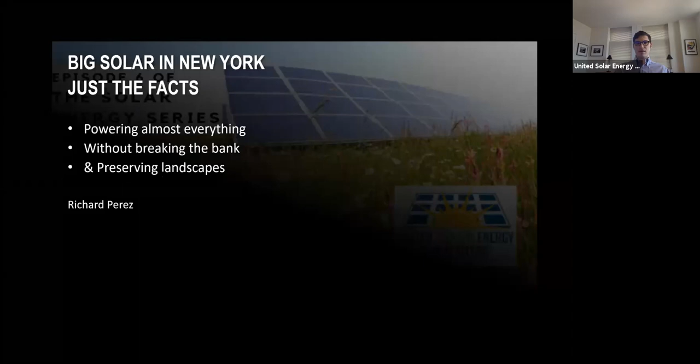So the title of this presentation is Big Solar in New York, Just the Facts: Powering Almost Everything Without Breaking the Bank and Preserving Landscapes. I would like to acknowledge some of my co-authors from Clean Power Research, Pace University, University of Rome and URAC, who helped me develop some of the figures I'm going to present today.

And the plan of the presentation is first why we need big solar, how you do it, is there enough sun to do it, what when the sun doesn't shine, is it cheap enough? Then we'll focus on New York and look at powering just almost everything, the electric sector, as well as electrified transportation and building sectors, and where to deploy while not paving the state over with giant PV farms. And finally, how it happens. Is that more a technology question or a policy question?

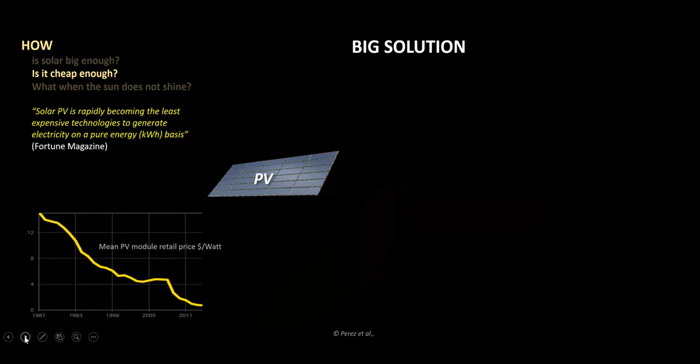So is it big enough? Yes, very likely. Is it cheap enough? Solar PV is rapidly becoming the least expensive technology to generate electricity on a pure kilowatt hour basis. That's from Fortune magazine. This is the price of a photovoltaic module since I got started. So it went down by a factor of 50.

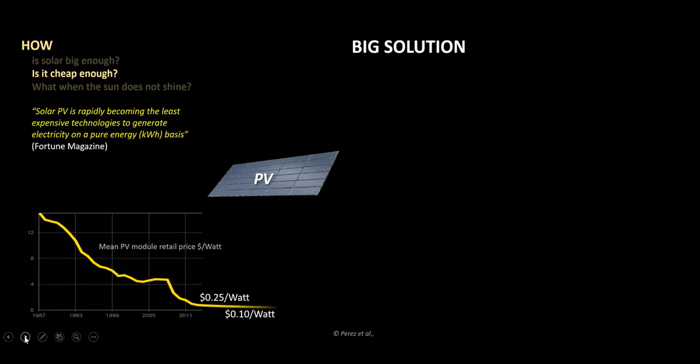And my friends in the industry tell me that a couple of years from now, we can expect top of the line PV modules below a dime a watt. That's the Lazard Bank report, the latest one, that actually looks not at the cost of modules, but at the cost of produced megawatt hours.

And utility scale solar is now almost on par with utility scale wind, and measurably cheaper than conventional generation, including combined cycle natural gas. So we have a big solution. It's also prospectively a cheap solution. But what when the sun doesn't shine?

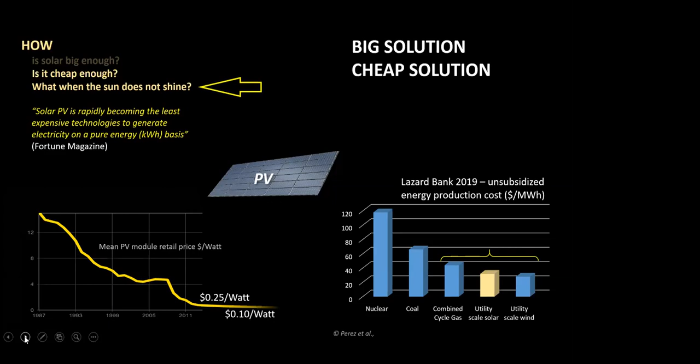Because when I compare those prices on the bottom right here, it's not a fair comparison for sure. Natural gas is dispatchable and can be firm power generation, whereas solar and wind live at the whim of the weather and the seasons. So it's not quite the same. So let's look at that more in detail.

So as a result of that intermittency, solar occupies a marginal position and needs to sit on top of dispatchable, controllable generation to operate, and doesn't acquire a grid dominant position. It would have to be transformed to be dispatchable to do that.

And my opinion is that intermittent marginal position is at the root of some of the opposition that is growing in the country between grid operators and the solar industry, because new plants are built online and someone has to manage that variability. And that's what happens inside the day. It's an intraday issue that's probably easily resolvable with a bit of storage.

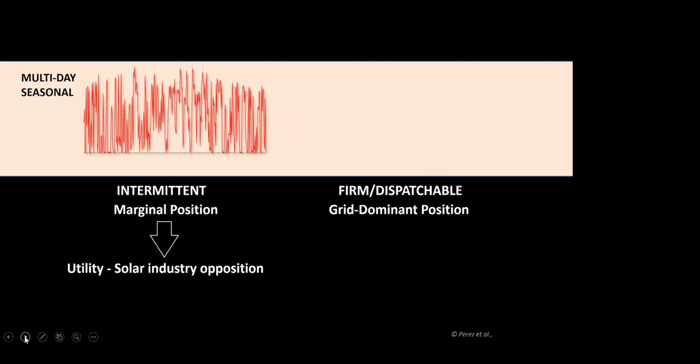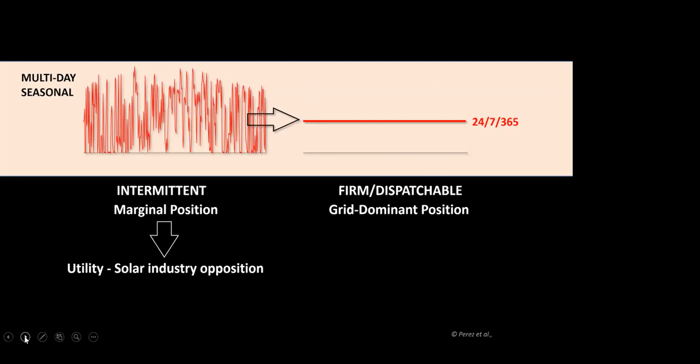The much bigger problem is a seasonal and multi-day problem. When you have weeks of cloudy weather in a row in a low yield season, you have to do something. So solar would have to be transformed into something that's available without fail, 24 hours a day, 7 days a week, and 365 days a year if we want to acquire a grid dominant position and be able to replace this type of generation with solar and wind, which are both variable.

So how do you transform an intermittent resource like solar into something that's firm, dispatchable, 24/7, 365? Well, energy storage is on everybody's lips. And it does work. When you have excess, you put it into storage. When you don't have enough, you take it out of storage. You smooth variability with it.

There is one major issue with it: whereas the unconstrained kilowatt hour from solar is very cheap, see the Lazard report, making it firm 24/7 will cost a little fortune with storage only, because we will need so much of it. And that's even using the cheapest cost projection I could find for 30 years in the future with storage, because we'd have so many holes to fill in the off-season time.

So that sounds pretty much hopeless unless you think just a little bit outside the box and you overbuild the solar resource, and by design you curtail it, you throw away some of the output by design. You don't try to conserve everything that's being produced. And when you do that, something very interesting happens.

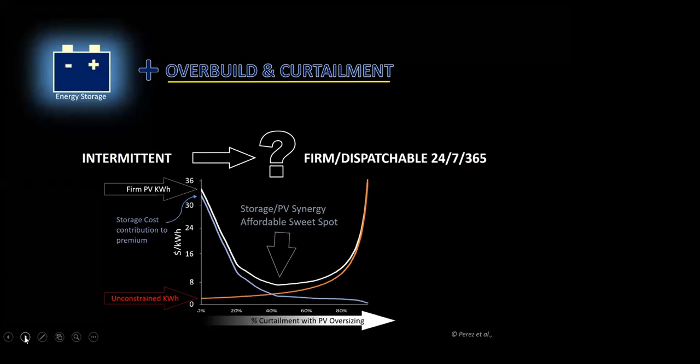But you can reduce it so much that you get to a point that's pretty attractive and can make you think, hey, maybe we can do it big time and be dispatchable 24/7. In fact, that overbuild and curtailment is so effective that we started calling it implicit storage, because it acts as a catalyst to storage. It enables storage to do what it does, but at a much, much lower cost.

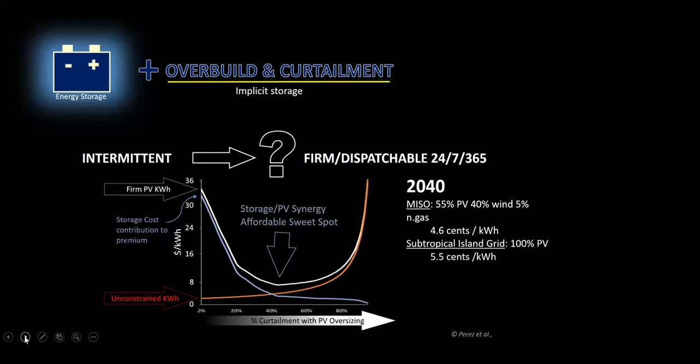And we've backed that up with major feasibility studies. We just completed, Clean Power Research did a study for the Mid-Continent System Operator, where an optimum mix dominated by PV could yield firm generation costs below 5 cents per kilowatt hour in 2040. We looked at several subtropical grids in the Caribbean and the Indian Ocean, and a 100% solar solution also could be done at very low costs. And my colleagues in Italy have looked at the Italian grid and came to very similar conclusions.

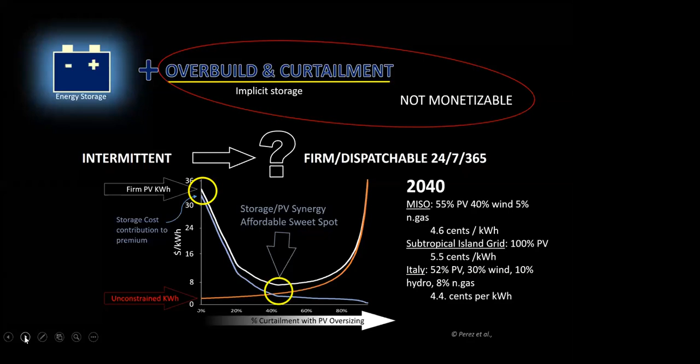The thing is that the solution that would get us there is not monetizable today. Developers are not empowered to overbuild and throw away half of their production. It doesn't work that way. So we're kind of stuck on an expensive marginal road when we could direct ourselves to a low cost and grid dominant future. So obviously what needs to change has less to do with technology than regulation and policy.

And the most effective thing that could be done, in my opinion, is to start monetizing firm kilowatt hours and evolving away from unconstrained kilowatt hours as we have today. So when you monetize firm kilowatt hours, you embed the storage, overbuild, and curtailment, the enablers of firm power generation, into the economic system that's being bid. And that could happen under the form of firm dispatchable power purchase agreements.

And we would have to evolve from the things that remunerate every single kilowatt hour today, the standard PPAs, the value of distributed energy resource, and net metering. And I must say, I've been using net metering for close to 25 years already, since it got legal to do so in New York, and I've taken full advantage of it, but it didn't necessarily help the grid to generate firm power from my system.

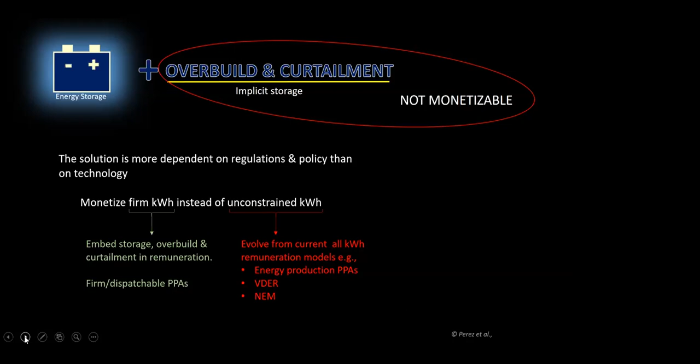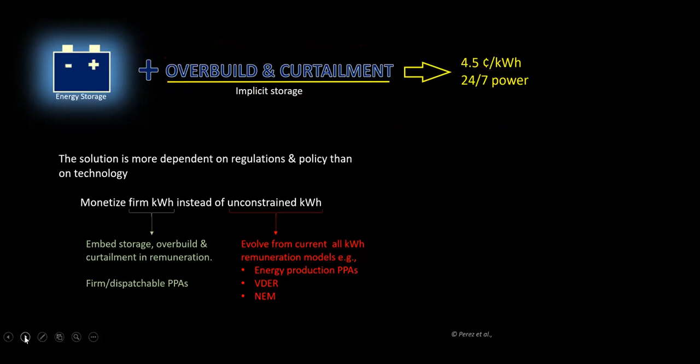So if we do that, we can look to a future that's both fully dispatchable and not very expensive at all. These are numbers that came from our MISO study, the Mid-Continent System Operator, which is a very large grid operating service that runs from Louisiana in the Gulf of Mexico all the way to Canada. We looked at every single region of that grid, and region 7 is not very much different, at least climatically, from New York. It's the Michigan part.

And in that part, the optimum solution is about 55% PV, 40% wind, and 5% that we kept of legacy natural gas, with an optimum PV overbuild of 50%. And that yields 4.5 cents per kilowatt hour by 2040, and by 2050 it would be 3.7 cents per kilowatt hour for firm power generation. So not run-of-the-mill PV, but firm, available 24/7. If you're interested, you can go into that study that's been published by the Minnesota Solar Pathways at this web address.

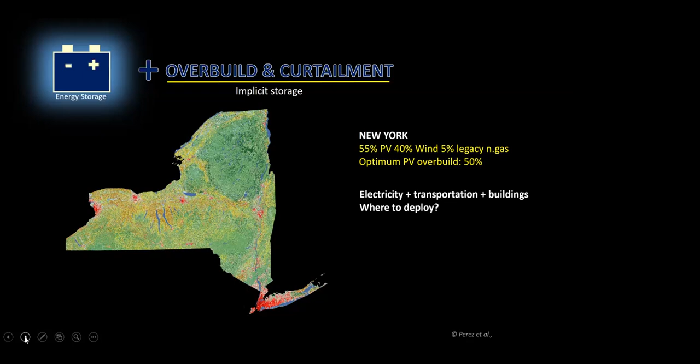So let's look at New York with that same scenario, 55% PV, 40% wind, 50% overbuild. And let's look at a case where we would power just about everything in New York, all the electric system, the transportation sector, which would have been electrified, and also the heating part of buildings that would have been electrified. And let's look at where we can deploy all the PV to meet that load, especially since we are going to overbuild everything by 50%, that has to occupy some space. So let's look at the demand side. How much do we have to supply?

So a quick look at the US as a whole first. This is the electrical demand of the US in terawatt hours. This is the terrestrial transportation once electrified. In fuel terms, it's quite a bit higher than that, but electric engines are quite a bit more efficient. And that's what the residential and commercial building sector would require after being electrified. Also, there would be a reduction from current primary energy consumption because of the coefficient of performance of the heat pump systems that would be used to electrify the heating load of those buildings.

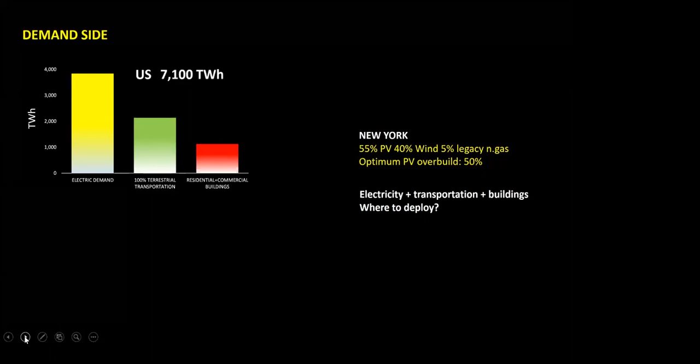Total, it's still a staggering number, 7,100 terawatt hours. That's the New York chunk. It's a good part of it. And you will notice that the building sector is proportionally bigger in New York, just because we have more pronounced winters than the average of the country. So it's quite a big load.

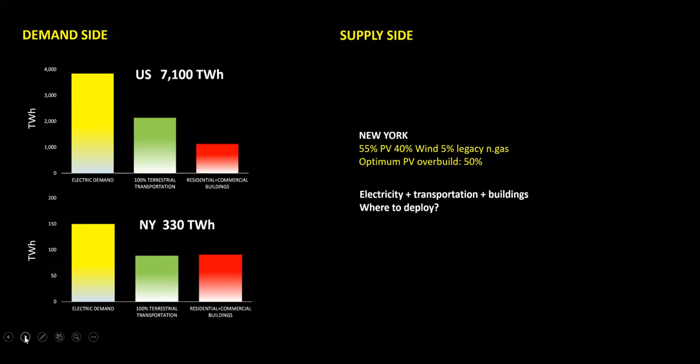So let's see on the supply side how much PV would be needed to do that job. We did the exercise. Given New York's climate and New York's resource, it would take 189 gigawatts of PV to do everything around the clock without fail. So that's about 30 times more than our current plans of deployment in the state.

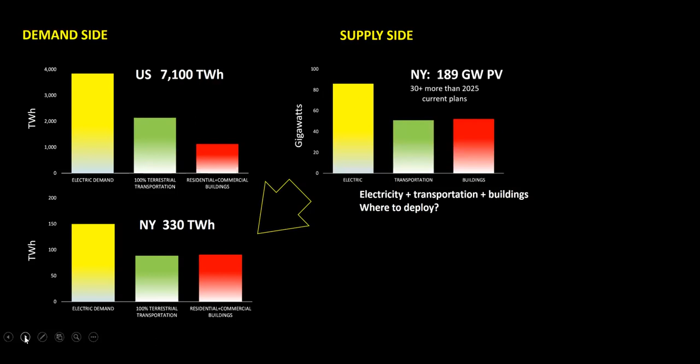And that would require a space of 360 square miles. So if you take it out of context, it's a huge number. Imagine a 360 square miles solar farm with no one in sight. It looks gigantic, but we'll put it in perspective and in context.

First, to put it in perspective, imagine that corn ethanol today in the US occupies 50,000 square miles. 100 of those are in New York State. And we're not even sure whether corn ethanol produces more energy than it uses in production of it. So for New York, 360 square miles is about the size of that little yellow part in the question mark that you see.

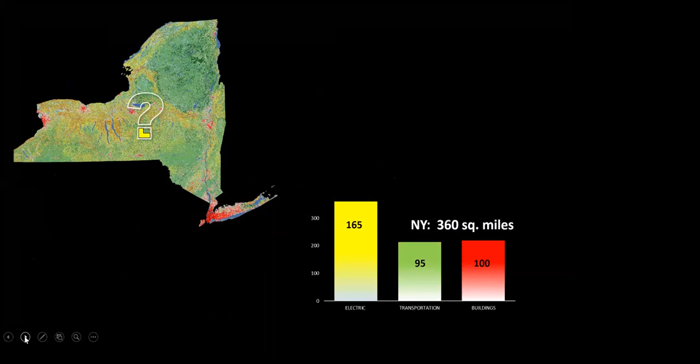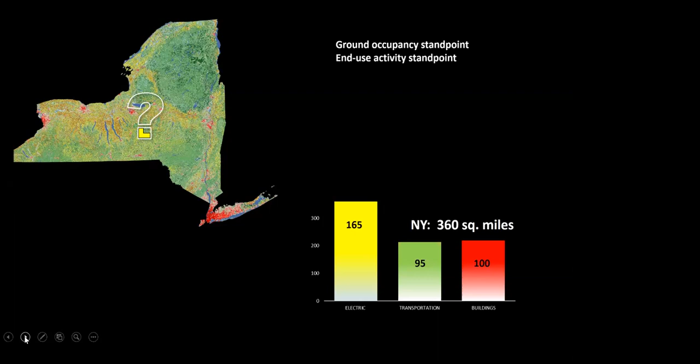And we look at how can we deploy that from two standpoints. One is looking at a ground occupancy standpoint, and another one is looking at end-use activity standpoint. So ground occupancy first, that's the ground occupancy of New York State. So the state is dominated by forest by far, then come the farmlands, wetlands, and then suburban and urban areas, open water, and some open land.

And we did a scenario, and I'll talk later about how that scenario can be adjusted at will, where we would occupy a fraction of that land cover: 15% of urban space, that amounts to a little less than the building stock and parking lots, 5% of the suburban sprawl space, 5% of open water, taking advantage of floating PV on artificial reservoirs. We've published extensively about it a couple of years ago. And then 1% of farmland, not a lot, a tiny amount of it.

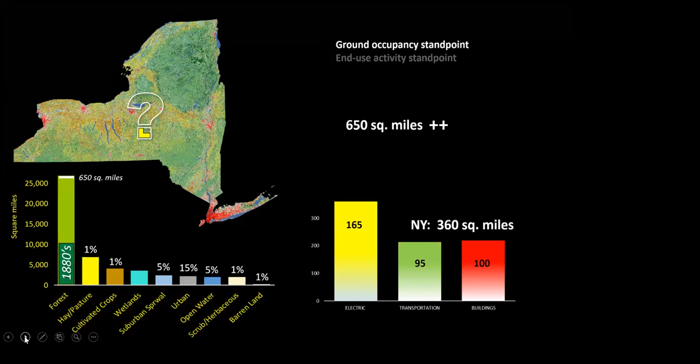And that alone leads us to 650 square miles, so much more than needed to do the job. And also to put it in perspective, let's remember that what we call forest today, if we look 120 years ago, it was farmland that has been abandoned since then when farmers moved out west. So it would not be unthinkable to take a little bit of that back to produce clean energy. That's what 650 square miles represent with respect to the forest stock. So there is probably much more than 650 square miles that could be tapped to produce PV.

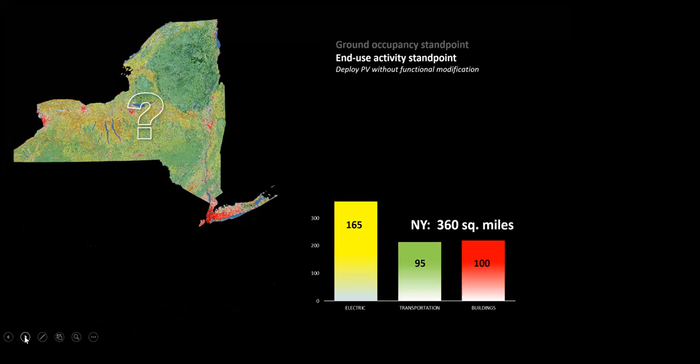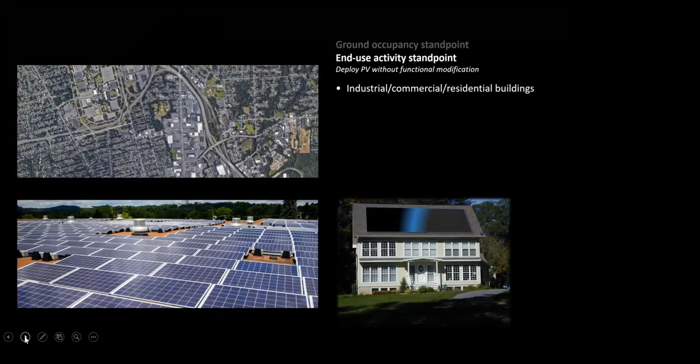Another way to look at it is to use that end-use activity and see where we can deploy PV without functional modification. So the first thing we looked at is roof space, building envelopes, and you have commercial deployment on the right, industrial as well, residential. There is a lot for the taking in the State. And for me, a city is like a giant prospective solar collector. And if you use 50% of that space only, it leads to 185 square miles of development for solar.

Another big one is power lines right of way. So I have a big power line next to me where I go to walk just about every day since confinement. So that space is huge in the State. The right of way, if utilized at 75%, would yield 161 square miles of development land for PV that's not being used today, and that has to be kept low to protect the wires above. Gas pipeline right of way, the same thing, but a bit less space, 21 square miles. Then you have railroads right of way, about 21 square miles in the State.

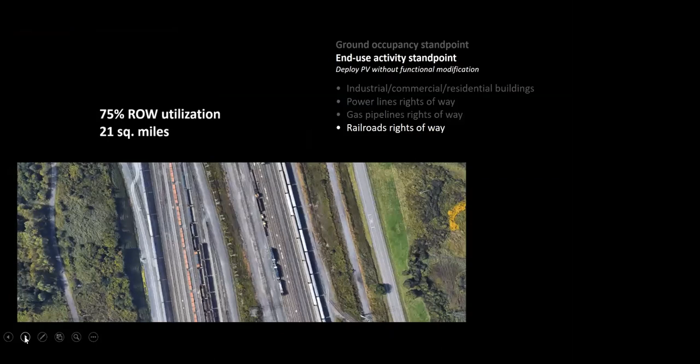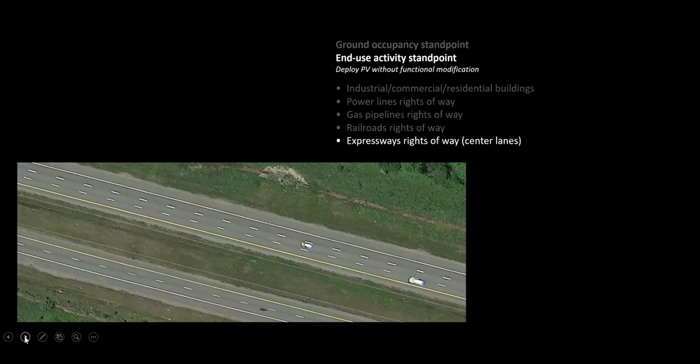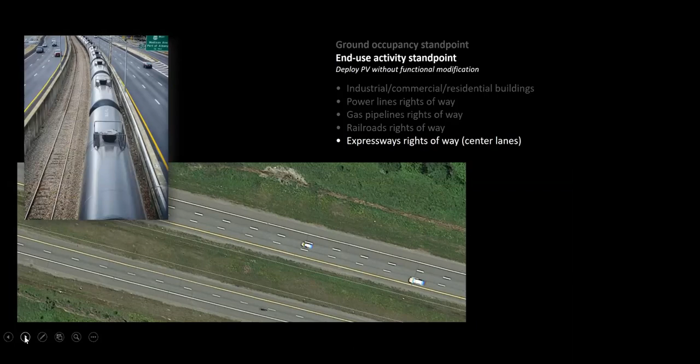You have expressways right of way, and here in that study that we are going to publish, we only looked at the center lane, which may be easier to do than other parts. And we use center lanes already for energy, as we see in Albany, as we well know. This is petroleum transiting on a center lane of 787 in Albany. That would yield about 12 square miles for the state.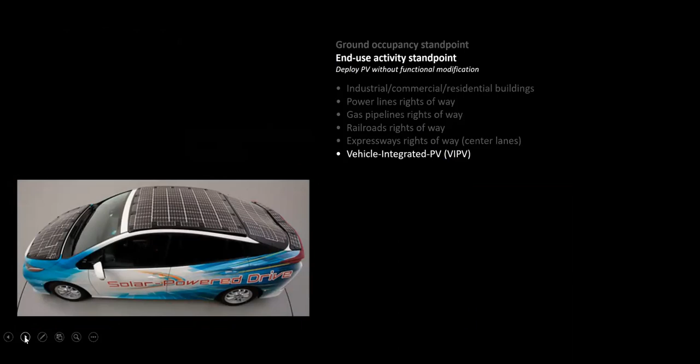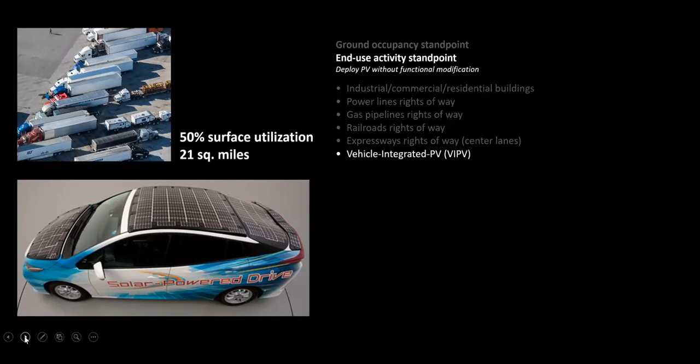This one may be a little bit far-fetched, but maybe not so. It's called Vehicle Integrated PV, VIPV. All the major manufacturers on the planet are looking at it more and more seriously, where you use the outside of a car as an electricity production facility. There are a lot of envelopes to be used, especially in the semi-truck. So those things could provide power for the transportation sector directly when it's rolling, and to the utility at large when it's connected to the grid through their battery system. The real estate, amazingly, for all the cars and trucks in New York State amounts to 21 square miles.

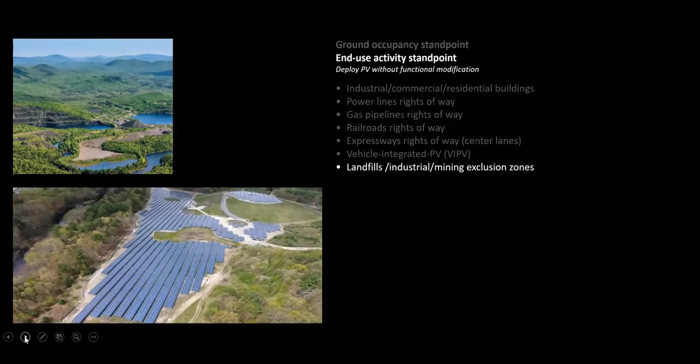Then you have landfills and industrial mining exclusion zones. In fact, we looked only at mining and landfills for that study. That leads to almost 30 square miles. And you have parking lots.

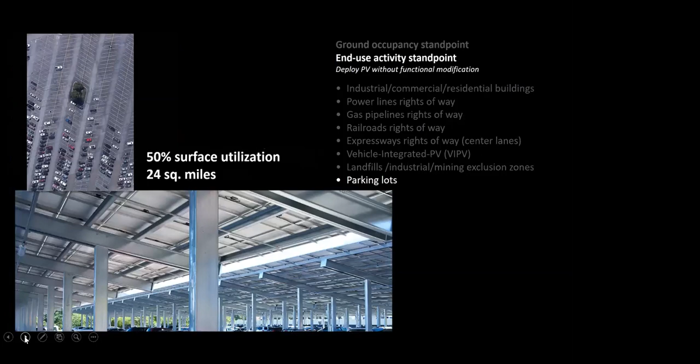Those occupy about 24 square miles, and they're already being tapped for solar deployment today. So that list is probably not exhaustive. There are probably many other sectors that could be tapped into, but just that is 475 square miles.

And I didn't count things which have a big potential that would require a minor modification of function as opposed to no modification of function: agrivoltaic farming solar, and floating PV on reservoirs, which is a fast growing field of photovoltaics. Plus maybe tapping a little bit in that forest stock by possibly extending the size of the right-of-ways for PV generation. Might not be all that far-fetched. So we probably have quite a bit more than we need as well.

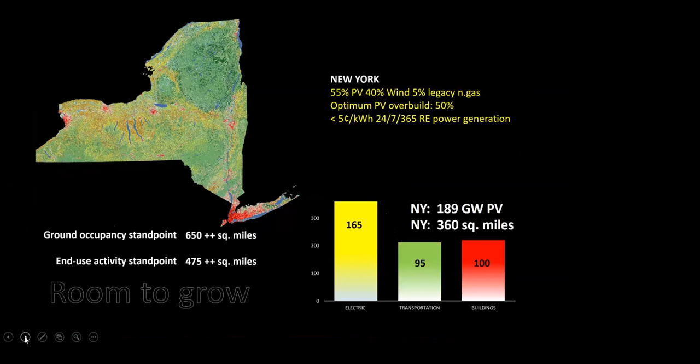So whichever way we look at it, either from a ground occupancy or an end-use activity standpoint, there is plenty of room to grow, especially since PV will be higher efficiency in the coming years. People are talking 30% with the advent of new technologies. We also have demand-side energy efficiency built in the CLCPA in New York to lower demand. So that number may not be as big to begin with. We may need less gigawatts covering less space. But even then, taking things as is, it's not fully unthinkable that we could almost consider 100% PV to power everything.

So how does it happen? Technology or policy? In my opinion, policy is front and center in the decisions that need to happen, the shift that needs to happen. The first thing, as we said earlier, is to monetize firm power instead of unconstrained power as we have today. And the second thing is to change from a case-by-case approach to deploying PV, like on houses, on businesses, and every which way, to more of an intelligent, concerted, optimized way of saying these are the good spaces to deploy. This is where we're going to do it, and let's plan it right and big from the onset.